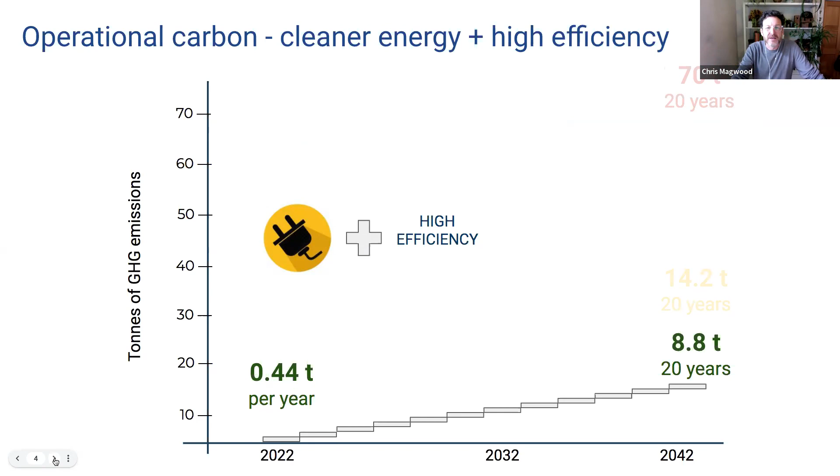And if we take that same electrified building and make it a much more high efficiency building, in this case meeting tier 5 of the National Building Code, we bring that down to just under 9 tons of emissions over the same 20-year period. So on the operational side, there's been lots of people working on this, and we know these are the pathways we can take to reduce the operating emissions side.

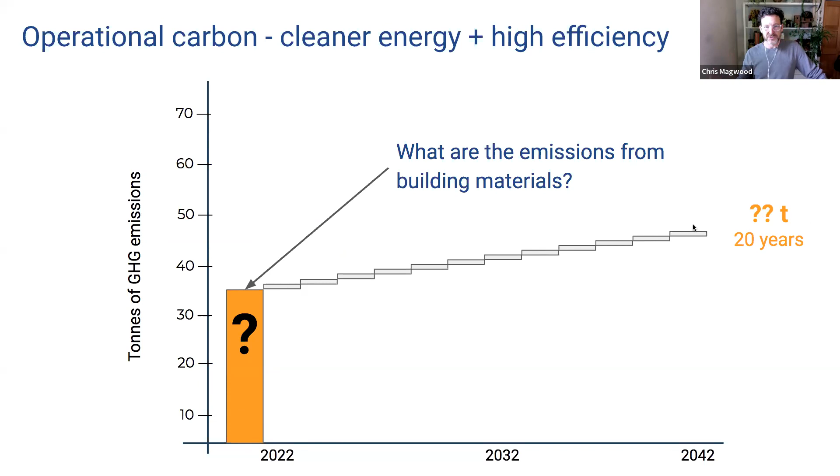But the work I've been doing and that I'm presenting today is looking at this orange bar. We know that before somebody moves into a building and starts operating it, there are emissions associated with harvesting, transporting, and manufacturing the materials that go into the building. But until we know what that number is, we don't really know what that building's carbon footprint is at 20 years. We know the operational part, but really what we want to know is what these two things together add up to. So the work we've been doing is trying to figure out what this orange bar is, so we know the total carbon footprint of that home over 20 years, 30 years, whatever time frame we're looking at.

And we've taken at Builders for Climate Action to calling this carbon use intensity, because if we combine these two numbers, we get a single metric we can use to try to hit or measure our progress against national, provincial, and municipal targets for carbon reductions.

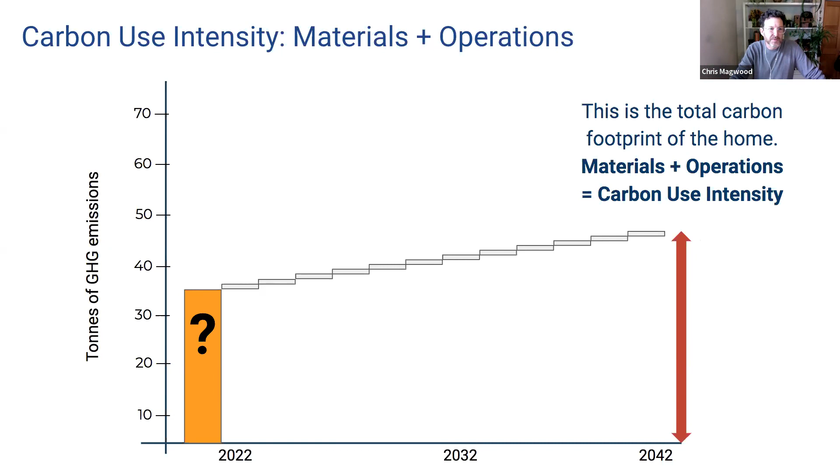So it's been an exciting year at Builders for Climate Action. Over the past year, we've worked on 3 really great studies, all attempting to answer the question of how big is that orange bar? What do these material carbon emissions actually look like?

So in the next few minutes, I'm going to quickly condense the results of a study we did of 190 model homes in 5 cities for NRCan, and then one in Nelson and Castlegar, BC, where we looked at 34 as-built homes. And then we just wrapped up this one, the EMBARC study for the GTHA, which looked at just over 500 as-built homes. So we're starting to feel like we've now looked at a lot of homes in the Canadian context, and we're starting to get a sense of what this orange bar actually looks like. So we'll start talking about that.

Just to give you a sense of how these numbers are generated - I'll keep this short because this isn't about how we do the calculations - they come from reports called EPDs, Environmental Product Declarations, an ISO standardized way of reporting emissions from manufactured products and materials. We have a database of building related EPDs in our tool called BEAM, with all of these EPDs and their data. We can model a building similarly to how an energy modeling program works: it has all the data and assumptions in the background, you put in the specifics about a particular building, and you get the material carbon emissions in kilograms of carbon dioxide equivalent, putting all the different greenhouse gases into one metric.

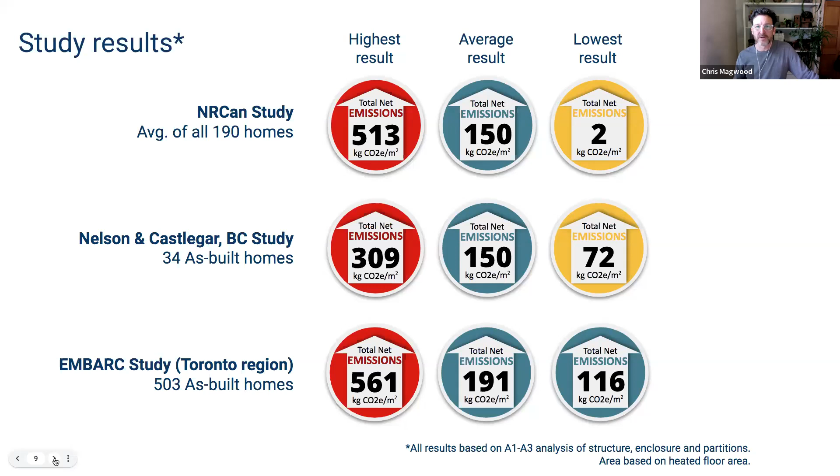We also got some great results at the lower end, buildings with quite low emissions - one building in the NRCan study falling almost at zero, just 2 kilograms per square meter. A great example from Nelson at 72, and even in the GTHA where the average was a bit higher, a few homes came in at 115 to 116 at the low end. What really stands out is there's a wide possibility of results, and from the as-built homes we see they literally land all over that scatter.

So what we want to do is figure out how to address that now that we know some of these numbers. There were some great results in the NRCan study - a building that was actually net carbon storing - and an as-built home in Nelson at that rate of 2 kilograms per meter squared. The NRCan study is of model homes, so that was theoretically achievable, but in Nelson we actually found a builder who had achieved that result.

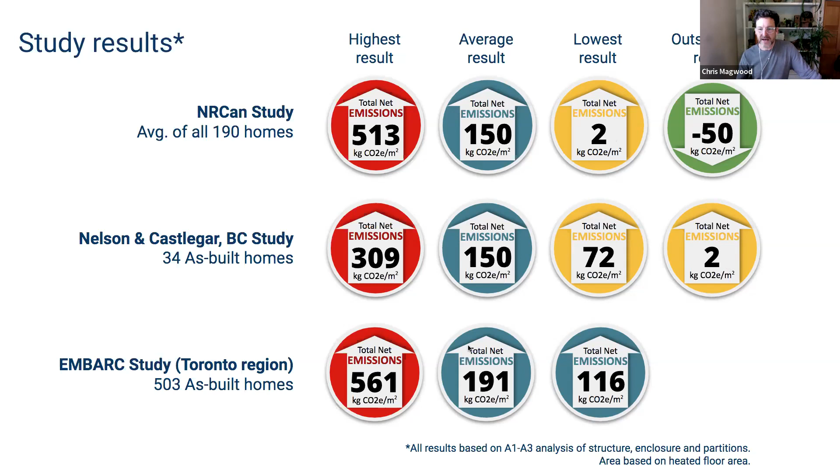I'm going to quickly look at some results from Nelson, because there we had as-built homes - we did the modeling of the materials, and we had their HOT 2000 models on the performance, the operational side. It's really interesting to see how those things fit together using these real world examples.

In Nelson, of the 34 as-built homes we looked at, the average was just under 29 tons of emissions from the materials in those homes. At the high end, we had a house at 63.6, and at the low end, a house at 5.9 - again, a wide range of results.

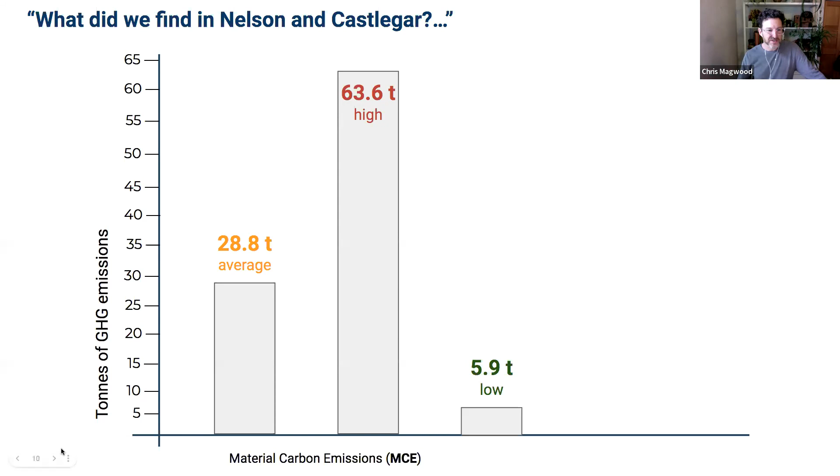But I wanted to look not just at the material side, but also the operational side. Taking the average in Nelson of all the materials and the average operational emissions, the picture looked like this: 28.8 tons for materials and just over 1.25 tons per year operationally. So looking at the carbon footprint of that average home in Nelson over 20 years, it's 54 tons - meaning it takes 23 years of operating that home before the operational emissions equal the material emissions.

And that really drives home how important it is when we're trying to meet climate reduction goals by a certain time, within the next decade or two.

That upfront piece that's in the materials is going to be the bigger piece in Nelson. From the higher end of Nelson, this wasn't the house with the highest carbon footprint, but it was sort of like a high carbon footprint house, also with a high carbon operational piece to it. So the house had 40.7 tons of emissions from its materials and just under 5 tons a year from its operations. At the scale that I made this diagram at, it actually falls off the scale.

In 20 years, it's just under 140 tons, 138.7 in the 20 years. So that's way over what that average showed us. And in this case, when the operational emissions are high, they'll equal that material emissions in just 8 years. So the lens you might look at this building through will change, because clearly here reducing the operating emissions will have a greater impact on that 20-year carbon footprint than when it's a bit lower.

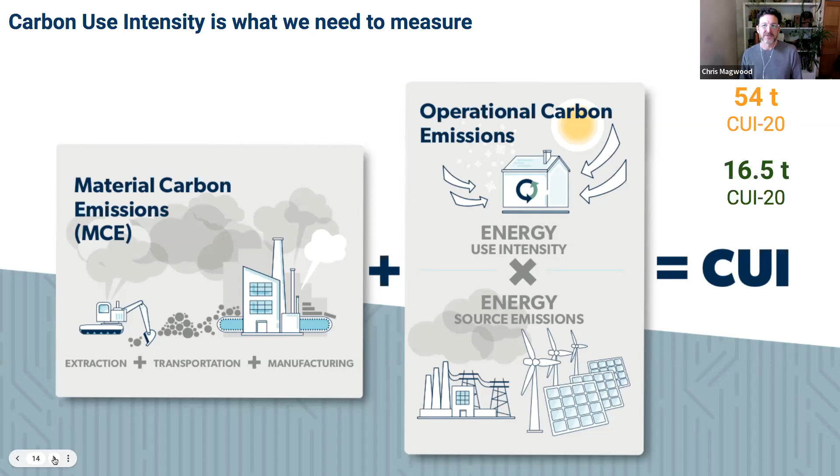The fact that we can have everything from a super low carbon use intensity to a very high one, and sort of everything in between, means that that's the kind of metric that I think we need to be focused on.

Also interesting from the Nelson study is because we knew which level of the BC step code those houses were at, we were able to see what was the correlation between the material emissions and the operating emissions. And what we found was there was really no correlation.

So a step 1 house, which is the minimum energy efficiency, one of the step 1 houses was at the higher end of material carbon emissions, and one was almost at the very low end. So clearly you can make a step 1 house that ends up at either end of the spectrum. And same thing, we have step 3 homes at the top and at the bottom.

We've got step 4 homes at the top and the bottom. And the 2 step 5 homes sort of landed squarely in the middle, but under the average for material emissions. So what this really says is this is not a game of either or.

We don't need to think about these things as opposing goals. It's not that we either have to address the operational efficiency or we have to address the material efficiency. We can actually do both, and we can do both well, and we can see examples of that in this study, or we could do them both badly, and we can see examples of that. So it's not a predictor.

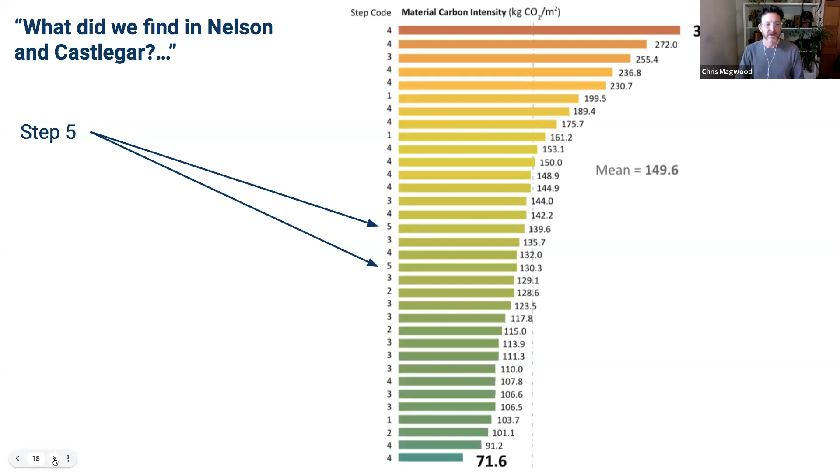Making a building more energy efficient doesn't necessarily drive up material emissions. They're based on the materials you choose. If you choose low carbon materials, you can still make a really high efficiency home that ends up with a really great carbon use intensity figure.

One of the last points I'll make is that I find this really encouraging from the two studies of as-built homes: here in the GTHA, there are some builders whose business as usual is 40% less carbon emissions than the average in that region. This is not a builder who was thinking about trying to make a low carbon building. They had no idea this was the result they were achieving, and yet they're achieving it. So what that tells me is pretty much every builder could be knocking 40% off their material carbon emissions total without any great hurdles in front of them, because there are already people doing that, and there's already people for whom that is their business as usual.

And then we see the same in Nelson, that there's a builder out there, also a production builder, also making a home for sale, also concerned about code compliance and affordability, and their business as usual is 50% better than the average for that region. So there's a lot of low-hanging fruit when we think about material carbon emissions, and these as-built studies really point out that low-hanging fruit is there.

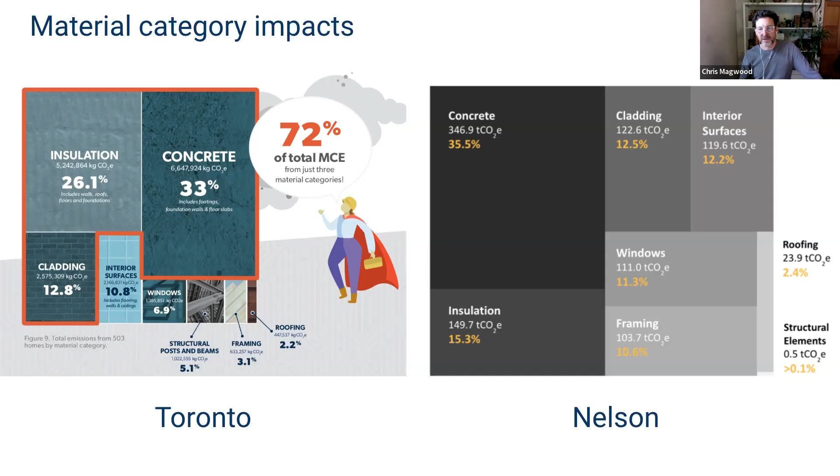So where is that low-hanging fruit? Well, in both studies, we found that concrete, insulation, and cladding were the lion's share of emissions from homes. Slightly different percentages between Nelson and Toronto, but they were the three leading categories in both places. So if we are going to chase after reducing these material-related emissions, those are the places we're going to get the biggest return from addressing.

In the Toronto study, we did that. We took one of the as-built homes, which had a pretty high carbon footprint, 262 kilograms of emissions per square meter, and applied a handful of changes in those high impact areas. We changed to the lowest carbon concrete mix available in the region. We swapped out insulation types for these two graphs, one in the wall cavity and the roof insulation, and one here on the continuous insulation. We replaced the brick cladding with a lower carbon option, in this case engineered wood.

For the flooring and the drywall, we didn't change the type of material, we just changed to the brands with the best carbon performance in their category. And that knocked 75% of the emissions from the materials of that one home. I think that's another great example of just how much low-hanging fruit there is on the material side in this sector of the construction industry.

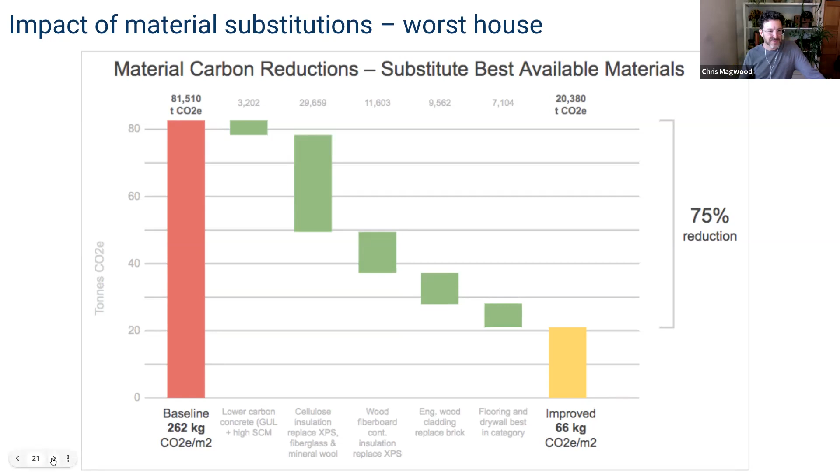The final result I'll share, because I think it's also interesting: we took the same material substitutions and applied them to a home from the Toronto study that already started with a much lower carbon footprint. So instead of 81 tons of emissions associated with the house, it started with only 33. If we applied all these same material switches to it, we ended up at 56.5 kilograms per square meter. The previous model I showed you showed it up at 66.

So once we find the places where the materials are going to make a big difference, it doesn't really matter what the house is or the design of it. If we apply a good material palette to it, we get to almost the same result, no matter where we started from. So somewhere in this range, 50 to maybe 70 kilograms per square meter, is really achievable without too big a change to our business as usual approach. Given that our average now is somewhere between 150 and 190, getting down into the 50, 60, 70 kilogram per square meter range is a huge improvement.

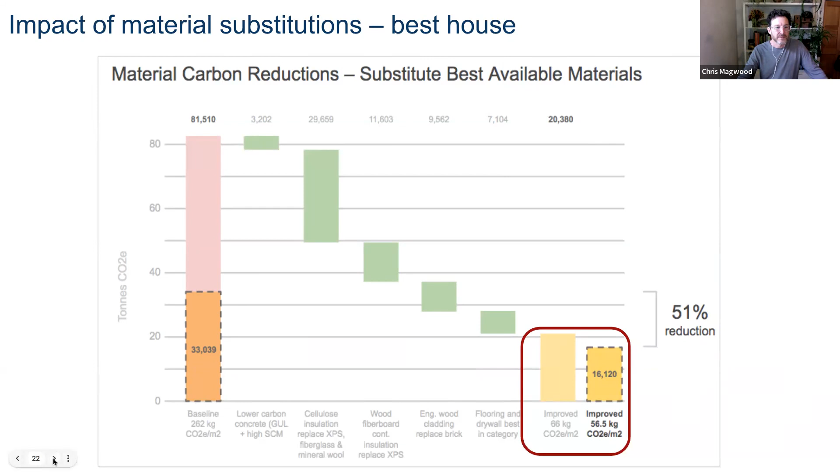My last point is to encourage us all to think about this as something you can do in bite-sized steps. You don't have to leap from your current practice into zero carbon or carbon storing territory on the materials side. If you think about a 10-year plan that looks at knocking 10% of the material emissions per year off those homes, then that's a 10-year plan to getting down to zero.

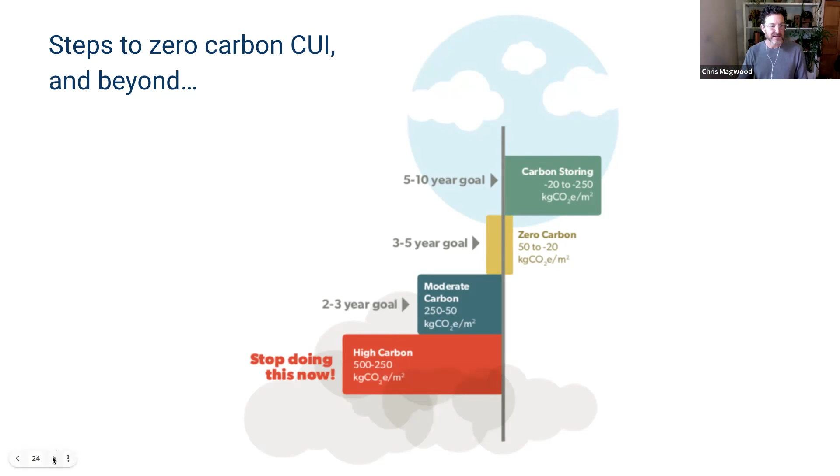Given that it's only a handful of material changes that make such a big difference, I think there's a way to strategically plan out a path where you tackle the parts of your buildings that have the most emissions associated with them, and then work your way up the tree from the lowest hanging fruit, higher and higher, thinking about it as a strategy you can plan out over a period of time, not just leap into full bore quickly. So that is it for my bit.

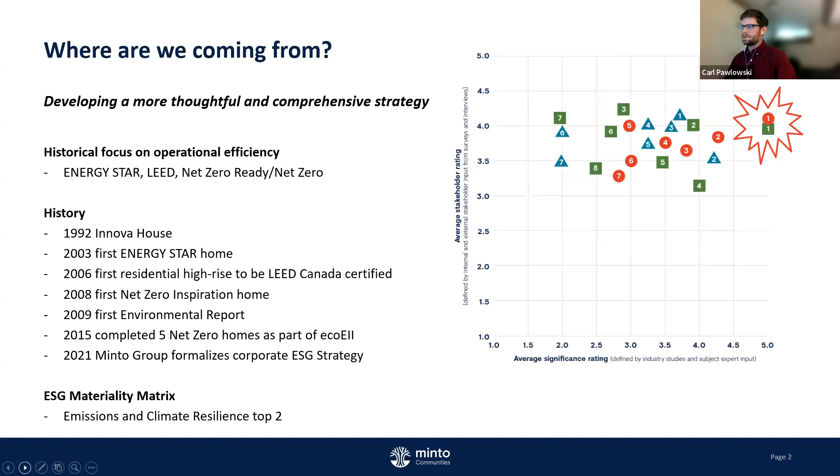More broadly, our ESG strategy also includes things like cybersecurity, ethics, diversity and inclusion, health and safety, and affordability. So it's a much broader strategy, but it's in place to keep momentum, keep people focused, and keep us moving towards where we need to be in the future. ESG may not be a new concept to most folks here, but it really looks at three key areas: business resilience, community impact, and environmental impact. You can find more on our website if you're interested in the details, but I wanted to share at a high level what's driving everything we're doing.

And next I'm going to get into specifically what we're doing as it relates to embodied carbon.

So the question, where are we today? We're still really trying to understand the issue. We know certain things, and certain people in the organization may be more knowledgeable, but we also need to disseminate that knowledge throughout the business.

We're a large builder with lots of employees, trades, and partners. Generally, as Chris mentioned, we focus on the structure and enclosure, which we know is 60 to 70% of embodied carbon. And something we've learned over the last year or two is that building high performance doesn't always correlate to higher embodied carbon. There's commentary that if you build net zero, you'll automatically increase embodied carbon in the home, but what we've seen is that's not necessarily true.

The second thing we're doing today is to really understand our baseline - where we currently stand as it relates to embodied carbon in each product type, structure type, and envelope type across all our geographies. I'm mixing in both Part 3 and Part 9 discussions here because that's what we build, so I don't want to fully isolate those two. We operate in Ottawa, GTA, Calgary, Florida, and South Carolina, so we want to understand where we stand across our entire portfolio.

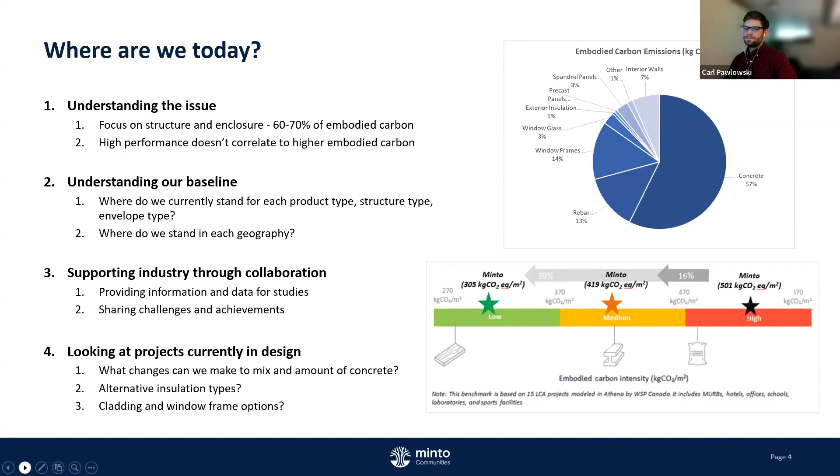And last, I'm going to touch on... Oh, did you mean to stop sharing? No, sorry, the PowerPoint crashed there. Give me one second here.

There we go, is that back up? Okay, perfect. The last thing I'm going to touch on is looking to the future - where do we need to go? First, we need consistent metrics and methodologies, and again I think Chris presented a lot of those.

The BEAM tool as a tool to measure embodied carbon, and then looking at the metrics - he got into detail on MCE, MCI, carbon use intensity. I think we've got a lot of those tools today, we just need to increase adoption and how many people are using these tools across the industry.

The second point, target setting. We're looking towards reporting on embodied carbon and disclosing that publicly to share with the industry. I think there's value in having voluntary thresholds set, and all of that will help drive towards those long-term changes, that 10-year strategy Chris was mentioning.

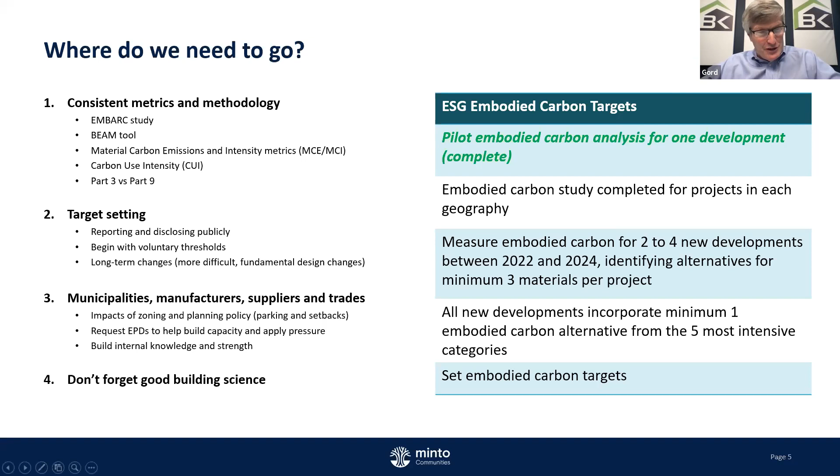Thanks for that, Carl. Obviously, we're building science enthusiasts. We all take our information from, I would say, the grandfathers of that. I don't think he wants to be called a grandfather, but the John Straubes, the Joe Lstibureks, and so on. So we just want to make sure we get the science right.

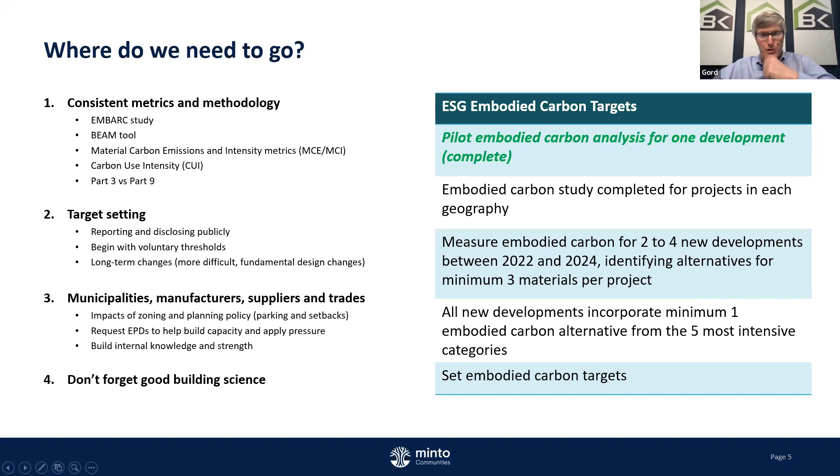Great. Thanks so much. So Miyoko Oikawa, I'm here on behalf of Doug Tarry Limited, and I'm going to talk to you a bit about our journey, which is going to sound very similar to what Carl just talked about, but that's okay, because it does kind of show you that at different companies of different sizes, you can take first steps to begin exploring carbon.

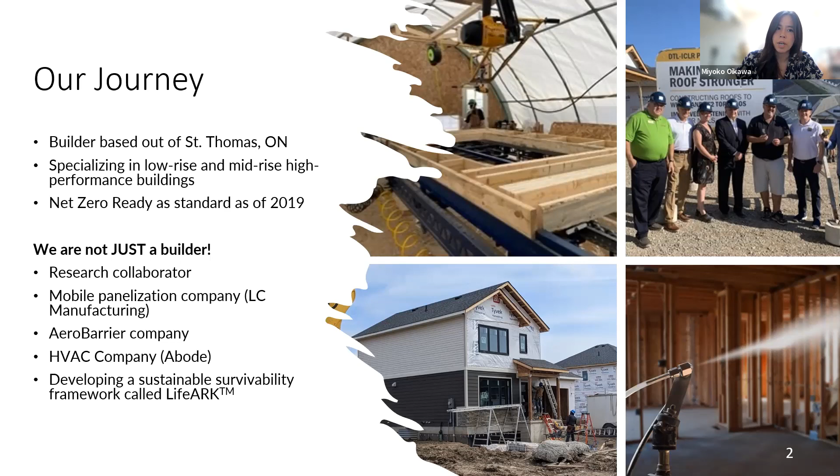So if you're not familiar with Doug Tarry Limited, we're a builder based out of St. Thomas, Ontario. We specialize in low rise, but we've recently gotten into mid-rise, high performance buildings. We build net zero ready as standard as of 2019. And just to add that we're not only a builder, but we're a research collaborator. We have started our own mobile panelization company, LC Manufacturing. We have our own AeroBarrier company, HVAC company, and developing a sustainable survivability framework called LifeARK. So some of this work on carbon will play into that as well.

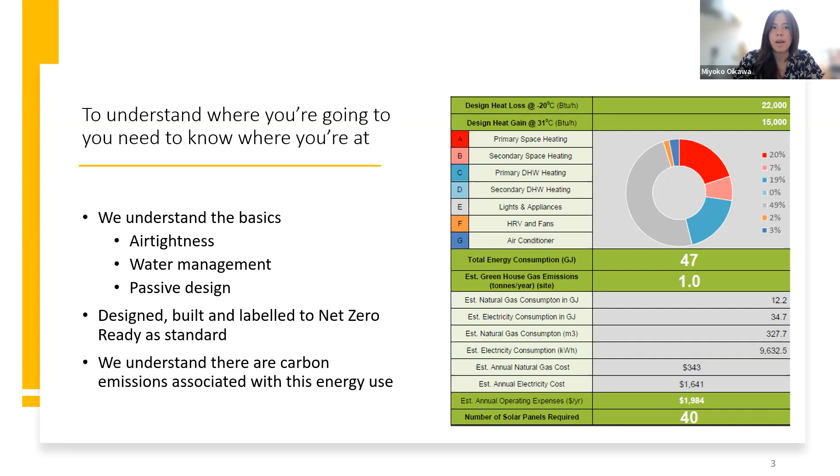So we believe that to understand where we're going, we need to understand where we're at. We've spent quite a few years working with building knowledge to work towards net zero ready. So again, building that to standard on our low-rise buildings. We had to work really hard on our basics. As Carl said, working on basics of building science. So really good air tightness strategy, water management, passive design with our buildings, understanding our operational carbon, and moving towards sort of this future idea of what else can we do?

Where do we go from net zero ready? So we're used to being on the bleeding edge, again, not as big a company as Minto, but just showing that regardless of the size, when you want to move to that next step, it's definitely possible. We're already sort of at the point where we need to think of what's coming down the pipeline in terms of code or municipal regulations, or even just what do we need to provide from an environmental standpoint.

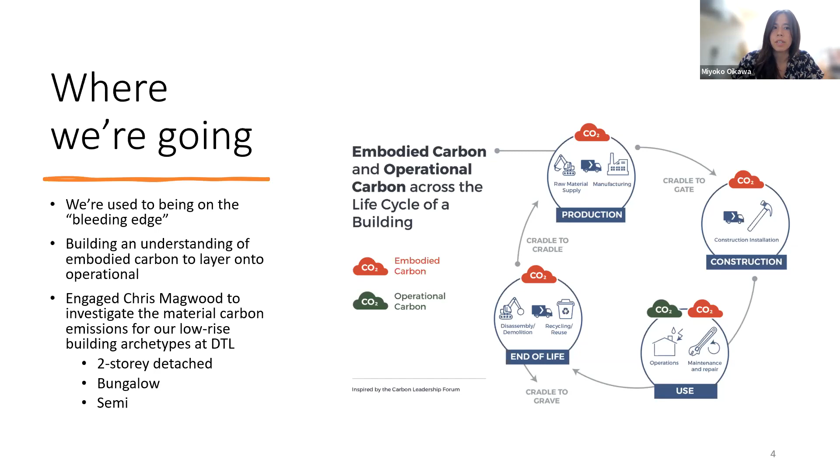Building on our understanding of operational is providing this understanding of embodied carbon. So we've engaged Chris Magwood to investigate this, the material carbon emissions for our low-rise archetypes. And that's really looking at 3 different model types. So I have them here. We have a bungalow, a semi, and our 2-story. And what we've had Chris do is use his BEAM tool to get a baseline for these prototypes for material carbon emissions.

Looking at this idea of a near-term solution, the 1 to 2 years, a medium term, and a future scenario. And the reason why I really like this approach that Chris uses is that it moves it into more digestible targets, so that near 1-to-1 substitution are simple changes that we can implement in the near future, and then moving towards that 2 to 5, and then that 5 to 10. And as we move into that future scenario, getting an idea of what types of changes we would have to make that could be quite impactful.

So when we think of those future scenarios, is it building buildings that don't have basements? So we're removing the amount of concrete that we're using in the buildings, more significant types of changes to our design. Whereas the near or medium could just be in the types of materials that we're using, and not doing huge changes to those prototypes and the look and aesthetic of the building that we're building, while maintaining proper building science. So again, the air, water, and energy targets that we already have.

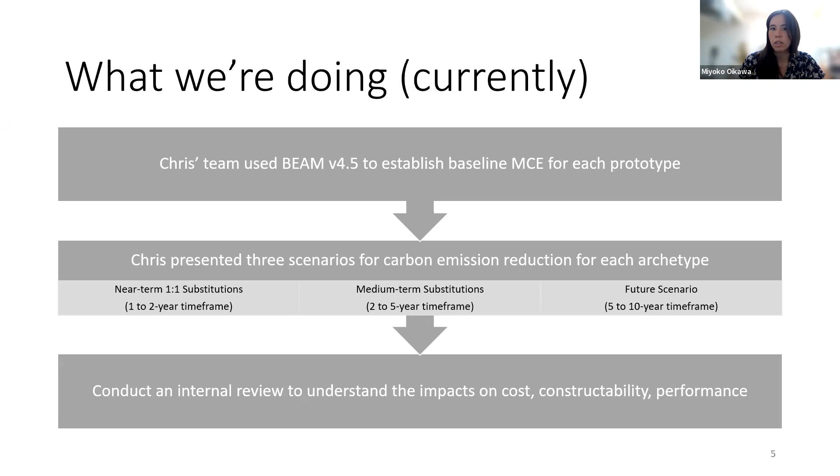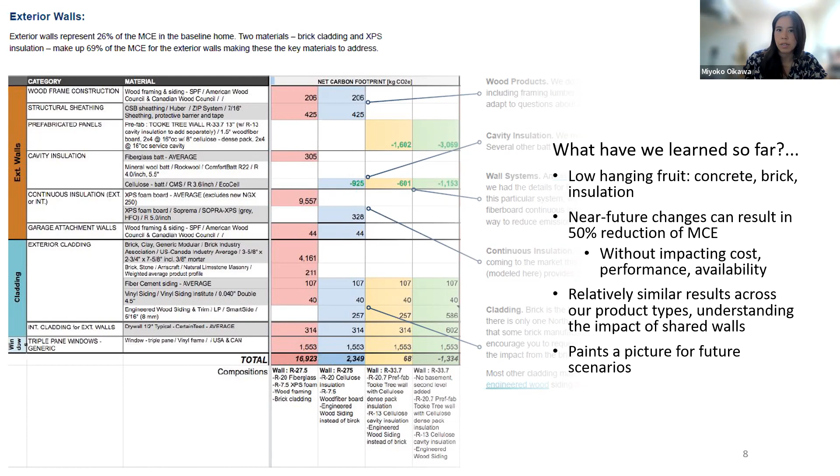Again, just painting a good picture of what we need to do in future scenarios. We do have a lot of questions as we look at where the industry is at, and as a company, do we feel it's important to participate in this type of research, whether it's benchmarking or sharing data within the industry or with policymakers? That's really because we feel there's insufficient knowledge capacity throughout Part 9 construction, especially compared to Part 3 construction and where they're at with carbon emissions. On the Part 9 side, there's a lot of 'what the heck is carbon, and who should care, and why.' We think further research is required, and alignment of tools across Part 3 and Part 9.

Just some questions: if targets were implemented, what are the tools? If I use a different tool, do I get the same output? If they're absolute targets, can I reach them with several different tools? Who's going to manage those and the databases? We want to reduce the variation between the outputs of those and just gather more data.

So I think you've heard from Minto, you've heard from us. We're already doing sort of advanced high performance buildings.

Do the results spread across builders who may just be building code, and for different areas within Canada? Questions for policymakers: again, if we move towards key tools used in the industry, who's responsible for database management and upkeep, and how do we take new information and feed it into the databases for those tools? What role will municipalities play in target setting? How will you incentivize participation? I think a lot of the Part 9 industry is just waiting and seeing, and there could be significant impacts if you go that route instead of providing information early. And how will this affect current or future energy targets? Can there be a good balance between energy and carbon reduction?

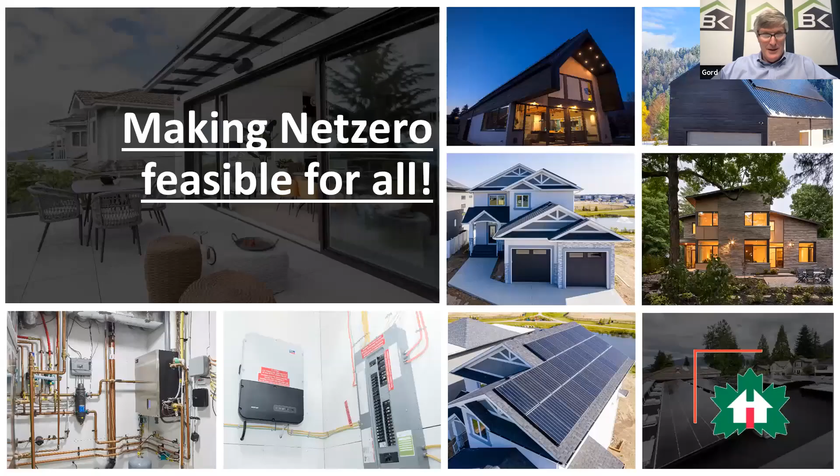So Frank, if you wouldn't mind, I think Frank's sharing screen. We still have Miyoko showing up on the screen. Yeah, apologies, I was looking for my unmute button - it moved location when I shared my screen.

Okay, so yes, thanks Gord for the introduction earlier, for the kind words you had for me. Also, just a quick introduction for CHBA - we represent more than 9,000 member companies across Canada.

The technical information from the groups that Sonja and I work for is used by many of the provincial, local and regional home builders associations.

Let me put my contribution here today in the right context with what we've heard so far from Chris, Carl, and Miyoko. Every time I listen to Chris, I'm learning new things, and it's great to have simple to understand tools and actionable knowledge as we're all looking for the next step. It's great to know that best practice builders are already applying these metrics and findings in their projects, as you just said, Gord. So congratulations to all the panelists who have come here before me. It's quite humbling for me to be here.

I can't probably add much value in terms of the building science or carbon discussion on the technical side, but I'd like to focus on the one word in the title that says 'beyond.' Where do we go, carbon and beyond, and put a little bit of a broad lens approach to the entire subject. I'd like to share some thoughts on how we can move the entire industry forward sustainably, affordably, and safely.

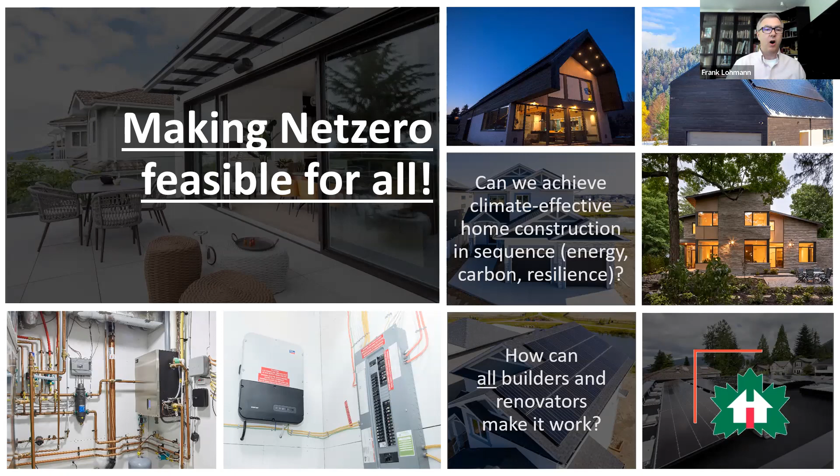I'm going to answer this one right away and then provide you a few details later. Can we achieve sustainable home construction step by step—first energy, then carbon and resilience? I would answer no here.

The wildfires, hailstorms, floods, and tornadoes don't wait, and we risk losing entire net zero buildings and carbon negative buildings, potentially even neighborhoods in larger cities with new developments, if we ignore resilience. Although I have to qualify this—if we ask, could we do it step by step? Sure we could, and I think, unfortunately, that's where we're set up. But maybe I'll leave that for the discussion panel. I believe it may take longer if we do this, and be more disruptive, maybe even harder to find an effective way to integrate all these aspects if we did it sequentially.

Here's why: I believe we may have already reached a point in some regions where increasing energy efficiency beyond the middle tiers may give us diminishing returns on GHG reductions. I know Chris just spoke to that. So yes, diminishing returns if you're looking for the low-hanging fruit or the biggest bang for the buck at this point—I realize we have to qualify that.

But we need to find a low-cost way to insulate and seal homes well enough, and stay carbon effective in any grid. Otherwise, homeowners will not be able to afford it on a large scale if we do that.

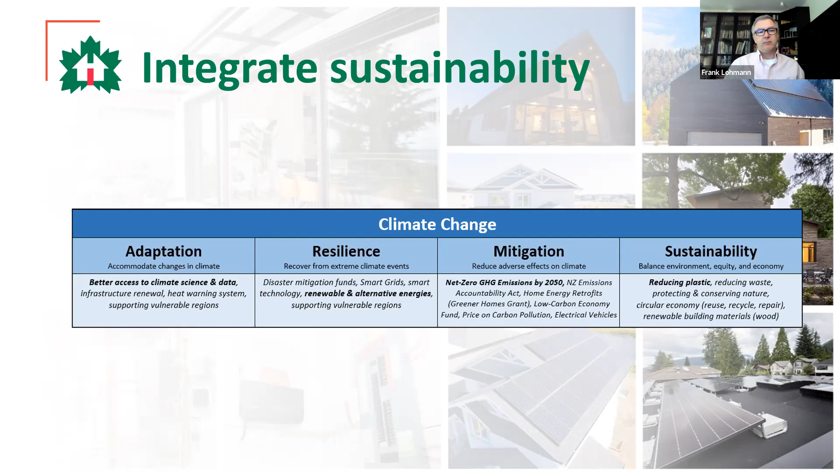For example, in the context of the 17 UN sustainability goals, you could say that what we title sustainability here in this little table is really the concern evolving around responsible consumption or sustainable cities. And in turn, looking at the continuum of sustainable goals, what we're talking about today would fall under goal number 13, climate action. So this graphic is really just a basic attempt to say that all of these goals are connected, and others are active on any or all of these sustainable development goals.

And we need to focus—sometimes we need to focus on single lenses. Maybe that's my point, and today that's embodied carbon. But only to integrate them into everything else. And I see from the previous speakers, from Miyoko and from Carl, that this is already happening, which is really great.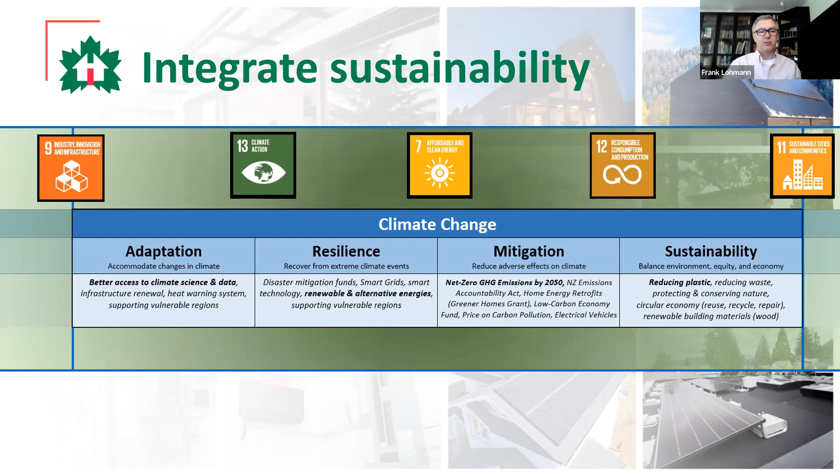So here's just a rich graphic to show you the areas that I am involved in, that the tech team at CHBA is involved in, and Sonja's team. It's kind of a heat map that talks about where we are most involved. You see the net zero home program there—obviously we spend a lot of time and effort there—but you also see on that graph other areas. For example, resilience takes up quite a bit of our attention. And then you see on the sustainability and adaptation side that it's getting a little less, but it just gives you an idea of all those issues that we're involved in.

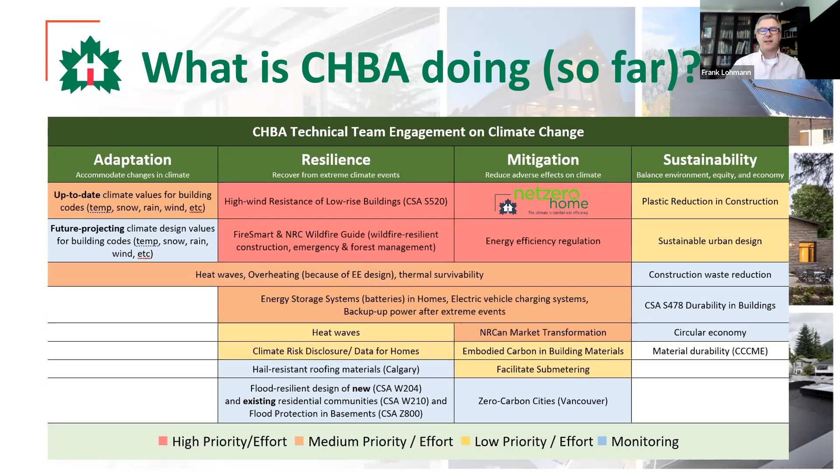What we experience, at least for my part, when I participate in any of these groups, is that everyone's just focused on one thing. I think the message I'm trying to give here is that we need to integrate all of that and maybe weigh our priorities of what we're doing in a special case, in a special project, in a development. So I'll leave it there. As I said, I'm not going to go through everything—it's a rich graphic just to show you the breadth and width of the areas that we're involved in and that I think should be considered. So then let's get to this question.

How can all builders and renovators make it work? What can builders and renovators do to integrate everything in their projects?

Kudos to all of you here on the panel already making this work. I love the implementation plan of short-term, mid-term. I can't add much to the technical discussion of how to do this, other than to say that all of us on the panel, and probably listening, including our support networks, have to become leaders in integrating. That's maybe my message here.

So this is really what I'd like to give everyone to think about. It's a slogan from Jim Carroll, a futurist, author, and consultant. And why I'm going philosophical is let me share a little episode that happened to me.

This was when I was still an NRC employee presenting energy codes in 2014 at the CHBA conference in Whistler. Tex McLeod, who some of you may know, went up to give a speech, and I was all, oh my God, here we go. Because he responded to my energy code presentation and said, look, people, we know how to do energy efficiency.

We invented high performance homes in the 80s. We can bring this to the next level. Nobody else can. Let's get our act together on energy efficiency.

And one year later, the CHBA launched a net zero program. All of you have probably been aware of that or working with Sonja on that. And today we're just at a similar spot, except we're being asked to add, to account for GHG emissions, decarbonize

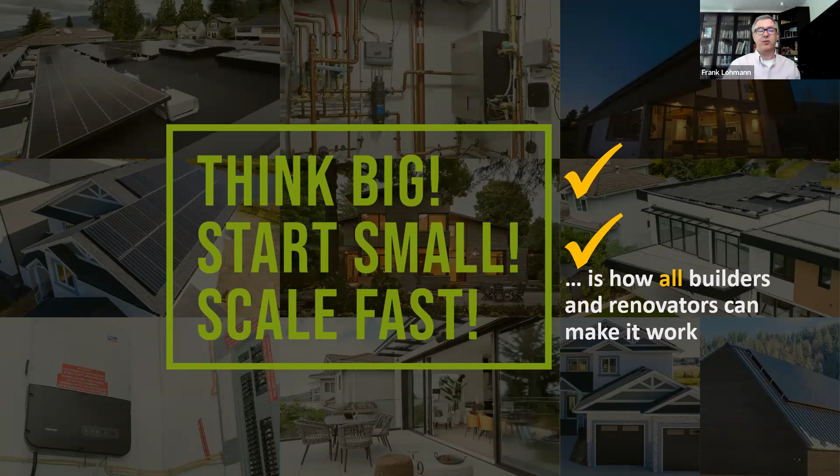So here are a few things to start us off, and maybe we can discuss some of those in the panel discussion. First, yes, we need to widely share simple, low risk, low cost, sustainable solutions. Those will become self-driving, transforming ideas that we all need to get onto construction sites.

Next, we should also try to integrate, as I said earlier, all these single lens issues into every project. Otherwise, equally important ideas would have to compete with each other. Accessibility or fire safety, we're talking about low carbon materials. Well, fire safety traditionally relies on low ignition or non-combustible materials, so does structure. So we need to talk about how to integrate them all.

Use best practices guides to scale solutions nationally. That's one, and I'm not excluding ourselves here, that's definitely one for the associations and CHBA, but also for governments. Let's make sure we add all the context we'll later need for codes to be effective for 100% of builders. Otherwise, our great scaling curve may actually go downward because of failures and warranty cases.

Then suppliers. Everyone knows how the supply chain looks right now. So, if we want to double the housing supply, suppliers now need to make plans to expand to tomorrow's needs. And if the material choices are changing, we need to account for that.

And also the support systems to get innovative solutions approved - innovative, alternative approaches - we need to make sure those are working streamlined and smooth. And then maybe, this is a big one, all levels of government.

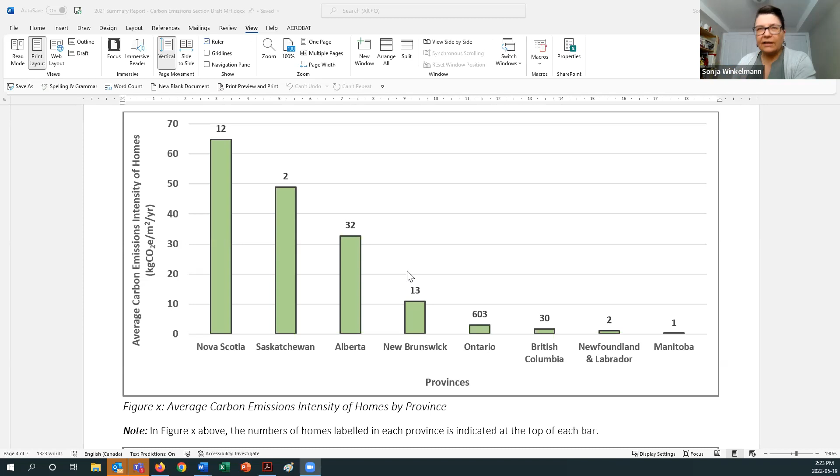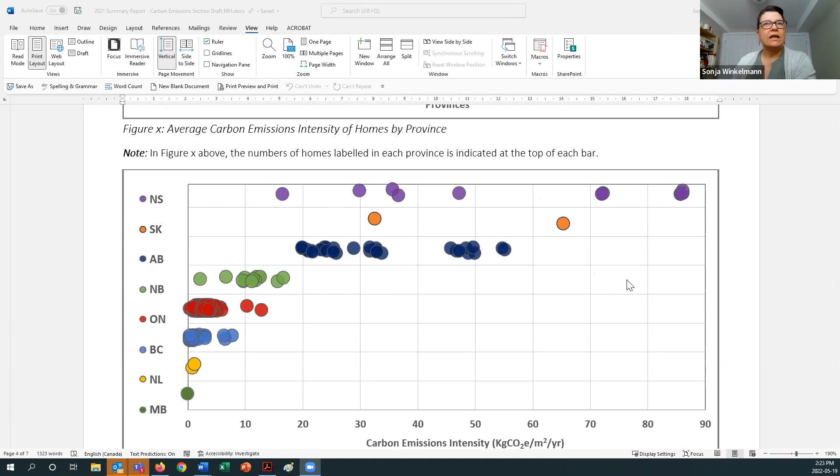And so now I think it would be of real interest if we could engage some of our net zero builders. Obviously Minto has already started to do some of that work, and since Doug Tarry Homes has the most number of homes in our program, it'd probably be a great case study to work with them to take a look at exactly what kind of impact the additional material is to get to these higher levels of performance in terms of embodied carbon, but then again also the offset of the renewables. We're seeing some builders now, which is interesting, production builders are not choosing to go full net zero, they're choosing to put a smaller array on their home, so they're only offsetting some of the energy with the on-site renewables rather than going all the way to net zero, which may actually end up being a good thing. We're not sure yet.

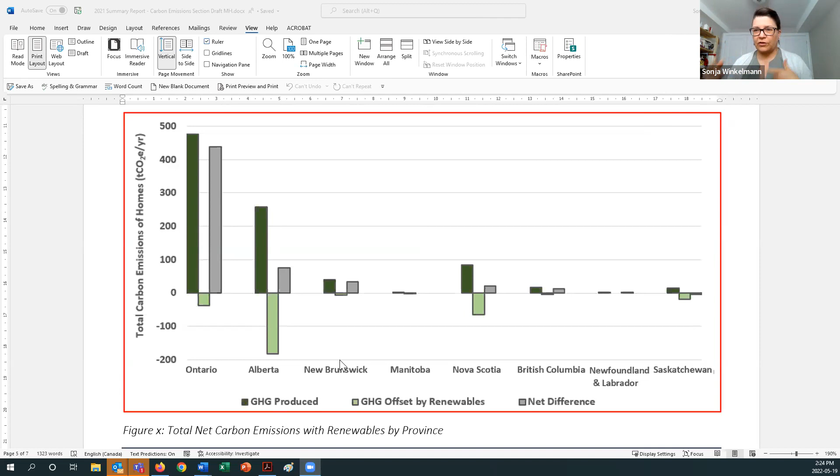So there's a lot of questions we still have and need to look into, and as always, we work with our builder partners to dig deeper into these types of things as we start exploring it. Thank you. And then Chris had asked, with new carbon taxes, are they applied to the material manufacturers?

And the thought would be, and he's assuming yes, as would I. And then he's suggesting that would impact the cost, because if the carbon taxes go up. So I think that's a fair statement, Chris, not so much a question as a statement.

Bridget's asking, and this may be to Sonja, that we use the term net zero energy, and now we think about net zero carbon. Do you foresee a carbon label from CHBA? Or do we see a carbon label from somebody else? And do we change the name of it? Your thoughts, Sonja?

Yeah, I mean, it's entirely possible. The management committee at the Net Zero Council have been asking this question for a few years now. And as we noticed here in the presentations, there's such a wide variety of tools. What we're still trying to figure out is, if all the tools are coming out with different answers, which tool should we be using? So which one's accurate? There's still a lot of groundwork that needs to happen before we can adopt anything with any kind of certainty. But I don't know if we'd even need to change it.

If we just stuck with NZE, it could be, instead of net zero energy, net zero emissions, if we wanted to embrace the embodied carbon piece as well. So I don't know that we'd necessarily need to change the name, more so just the definition and what it is that we're actually measuring. For example, in the US, the EPA is thinking about a net zero emissions label, not a carbon label but an emissions label, which is an interesting challenge to think about.